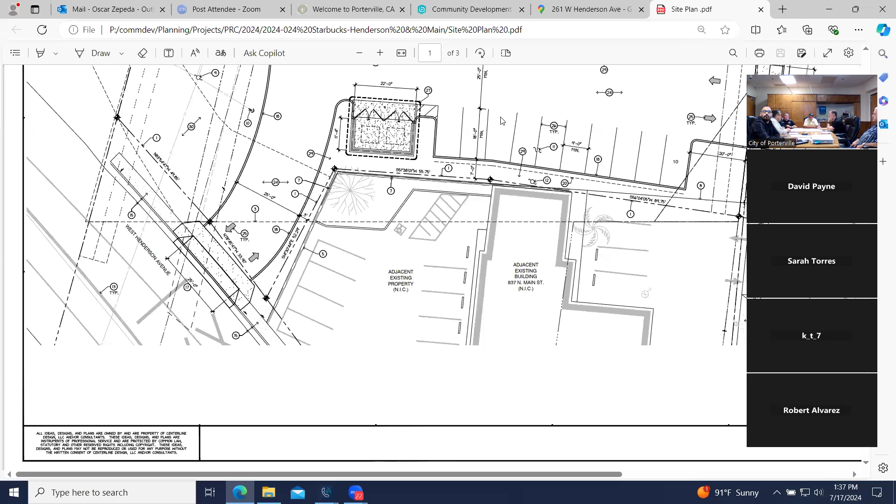So it'll just make it difficult. The other thing would be on Main Street. I know we are still going back and forth regarding lefts coming out at that point - a left in, or even a left out as well. So we're kind of still looking at the geometry a little bit more just to see how that would work, but I think as of right now everything's going to be right in, right out on both of them.

Yeah, you spoke to Hal Lore, and he's on the call. He's our engineer, and yeah, we were aware this will be right in, right out only.

On the trail, for clarification purposes, is it going to follow the old railroad down there? And then you said it'll be like a pedestrian crosswalk with the kind of yield lights and sort of thing. Yes, that'll be great, and it'll look a lot better than right there now. Oh yeah.

Okay, and you guys will have that opportunity to even make a couple of ADA walkways back to there, so that way we can maybe even get rid of - well, not in this case, 'cause I think there's already infill of sidewalk on both sides, on the north and the south. But I know future developments will be able to utilize that trail and maybe get rid of the sidewalk in the front of the properties there along Main Street and stuff.

In terms of this design, I mean, it's all pretty standard. There's a curb here already, so we'd obviously cut it out, but this is all fine with you guys. I think with that, we're probably gonna - I don't know if you ever, we call them pork chops around here, where we basically kind of prohibit the left turn to come out from the development. So we kind of make sure that we put a middle median in.

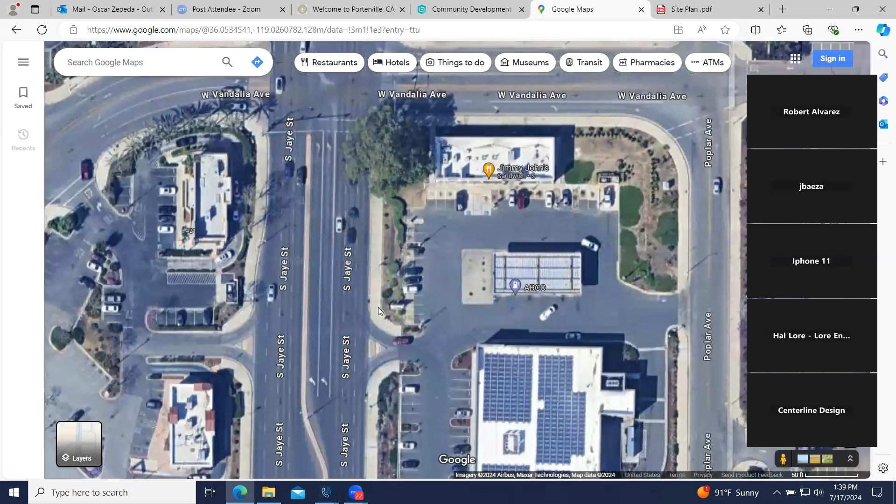Just to facilitate the right. If it's feasible to put a left turn over here, that would be great, just obviously for the tenant and the operation and longevity of the project. You're kind of liking that there.

So that'll be marked up for us to put on here. Is there enough room for us? I mean, I know it's wide enough for two vehicles, but I don't know. I guess there would be enough room if we extended it out this way. There is this power pole here.

That's pretty wide. I mean, sorry, this is Hal Lore, the civil. It's probably 60, 70 feet across there, curb return to curb return. We were hoping to stick with a standard commercial approach and then maybe come up with a custom solution.

The pork chops are difficult just because you're trying to prevent people from effectively turning left, and to get that in, they end up being big. We're just worried that we're going to sneak into the neighbor or into some easements and things like that. There's not a lot of room there to do that. And what Hal said, there's a lot of...

Right in, right out. Sorry, just kind of brainstorming out loud, trying to come up with something more effective than that large pork chop.

With all that, when he referenced the easements, there are a lot of easements on this property. Obviously we wouldn't have come this far if we didn't think we could work around it, and I think the site plan turned out pretty nice. But there's one here that our drive-through kind of goes through, and I think Hal's worried about a couple of the easements down here. This must be the easement for the trail. Obviously it wouldn't go over that far, but I'm assuming that's something we'll address during plan check.

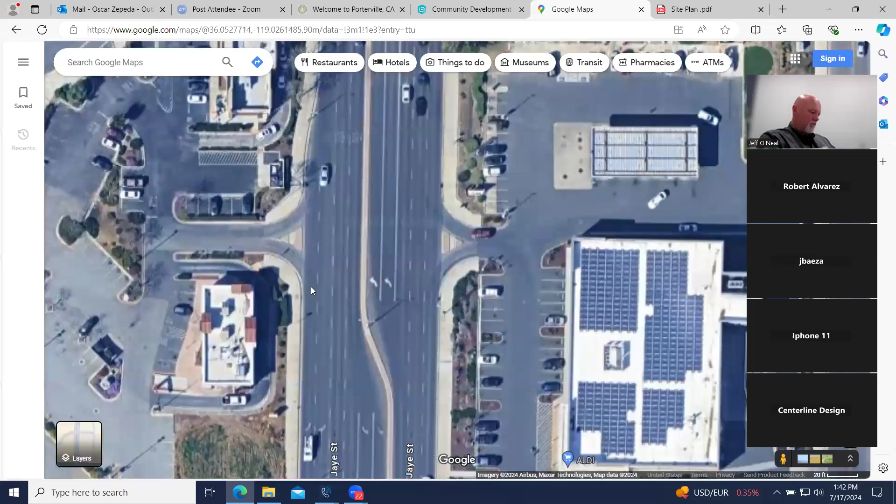I think the ones off if you go off to, let's see, the skate park—if you go to the skate park, we put little small ones there. I don't remember how big those were. Yeah, it's a little smaller, a little bit.

So they are a little bit smaller, and I've seen some people still been able to make that left turn there. And so it's wide enough to do it.

The only issue, Daniel, is that we modified the fire code, and we don't do that for entrance permits—oh wow, 16 feet on each side. The fire code called for 12, but everybody in the area, because equipment's getting bigger, longer, heavier, wider, all that stuff, area fire marshals all modified ours to expand that where there's an island, to make it 16 feet on either side, in case we have to deploy in that area.

Is that how the 16 feet is measured, from the end, the curb? So on the corner of the approach, on the right side it'd be a 16-foot wide opening, and then on the left-hand side, a 16-foot wide opening, at a perpendicular angle.

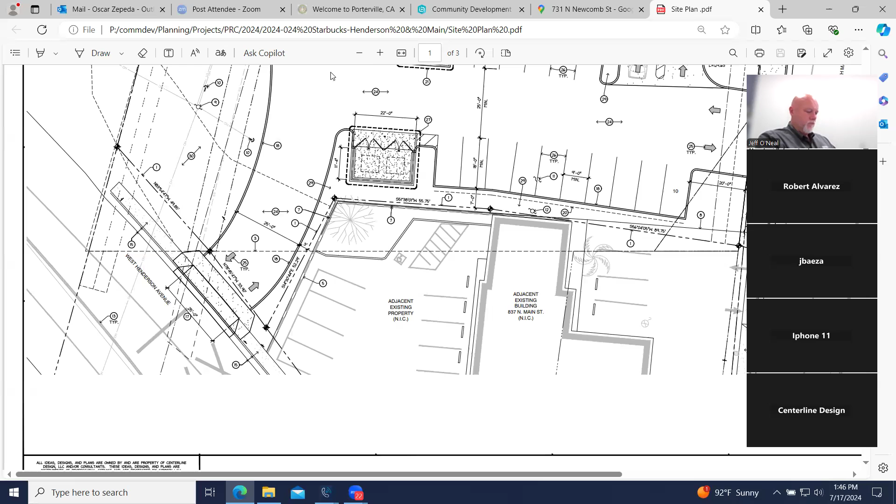And I do believe everything's there. So, storm drain going? Is this a good time to talk about that? Okay, so we were anticipating just kind of a sheet flow out here.

Is that something - so with the new MS4 standards, they're going to have to change a little bit more. And so we would need some calculations from the state MS4s. We usually use their spreadsheet that kind of dictates what kind of pervious concrete can be used, or something on site like a drainage swale. Once that fills up to a certain point, it can get out into the actual storm drain system. Okay, that will be part of the comments.

So the post-construction you're speaking of, is that just at the state level only? It's not that you don't have one for yourself? You're just keeping the state one? No, it'll just be state level. Just curious, do you know if this area drains to like a regional master plan basin, a city basin? It does. It does.

It's a bigger thing, but here in Fresno, we've got a local flood control district separate from the city. They manage our Clovis Fresno drainage system. So for years they've been successful in letting the basin be the post-construction feature, so to speak, to handle the city. So as we develop in Fresno and Clovis, we don't have the post-construction requirement, because the regional basin the city provides has the ability to retain all of that water.

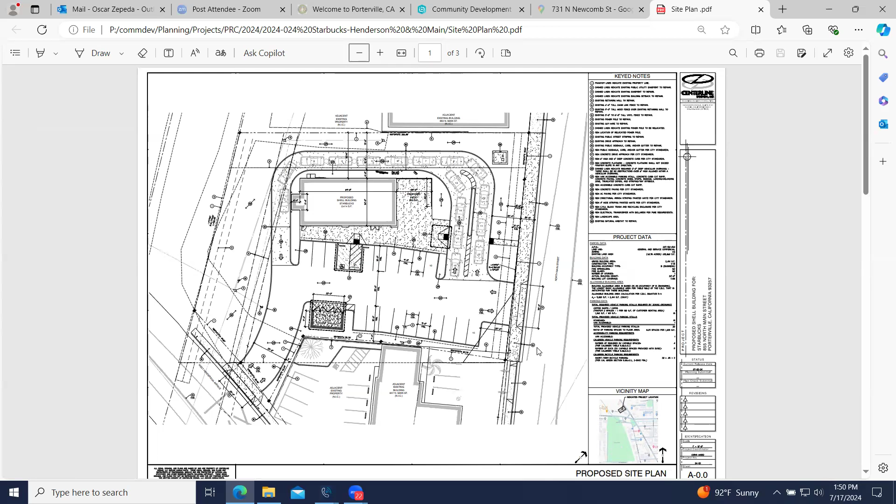I do believe water and sewer are available, so I think - speaking of that sewer - Mr. Melvin here was telling me it's over here somewhere where we could tie in, correct?

Remember years ago when I bought the property, they had partially opened that up where Sierra Appliances is up top there. There's a lateral that's going down the back of the property and goes to Henderson Avenue. Yeah, and it's in place. It's there. It's never been dug up since I've owned the property, that's for sure. Okay, there we go. Great.

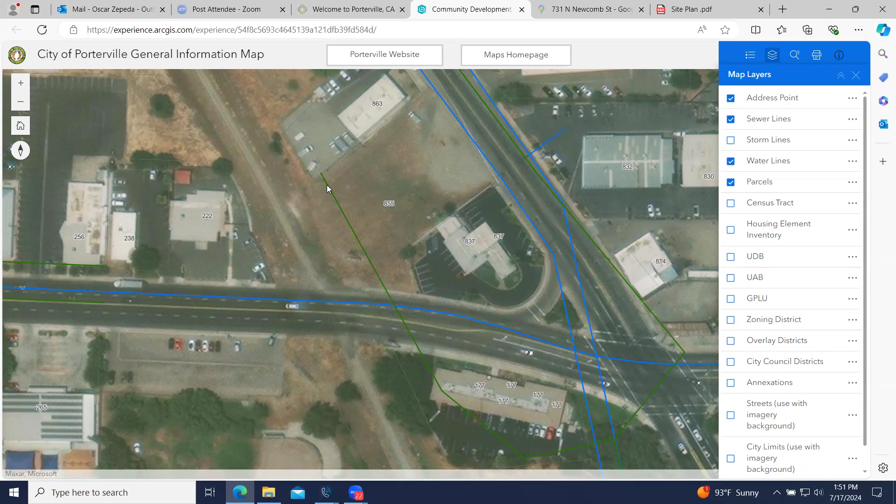Yeah, I was going to ask if that was because that easement came up on our title report, and we didn't see any visual evidence of the pipeline, which is not uncommon, but wanted to ask the city if that is an active pipeline, if we could use it, if it was of use to us.

Yes, that is an active sewer main, and there is a manhole right there. You can't really see it from this aerial, but there is a manhole just where it drops down real steep right there toward Henderson.

Up in the dirt area, I believe. It's been a while since I've been out there. So as it steps down the grade past the pole, you're saying there's probably a manhole there. Correct. I don't think we located that, it could have been covered. It'd be to the left, right? Yeah, the other way. You're saying it's in this embankment to our left? Yeah, that's correct.

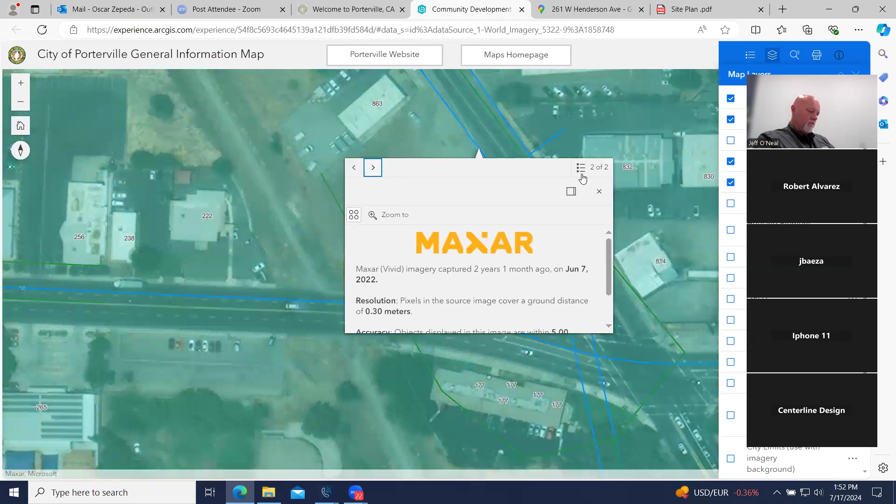And where are you able to share with us where the water tie-in would be? Is it off of Main Street? Yeah, there is one off of Main Street. So we have either option? Main or Henderson, okay. And how would you determine what the best option is going to be for water? We would, I mean, you have one on your frontage on the Main Street side, so I would take that, it just saves the trench repair and so forth. We'd have to look physically where it sits, it's probably somewhat in the lane. That's fine, let's assume that one, since we already have to do curb and gutter on that side anyways.

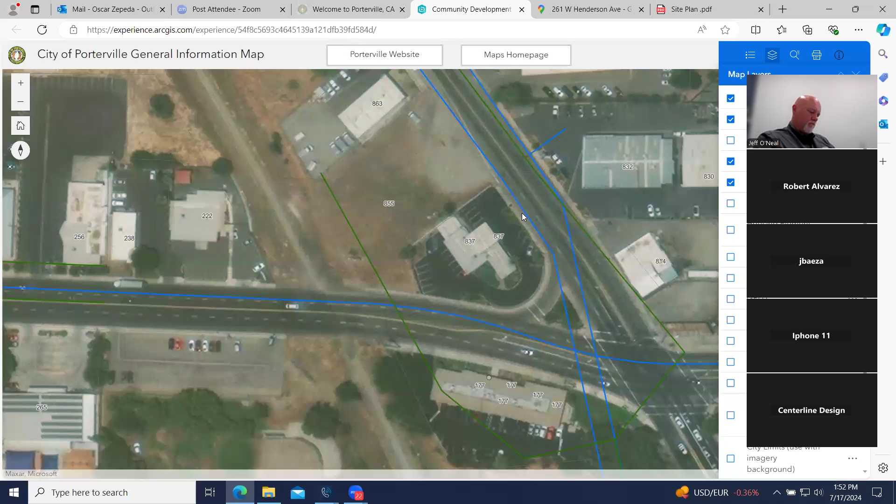And then power, while we're on the topic of utilities, we put the transformer over here just from the more digging we did after we submitted this. Our dry utility consultant said this pole has way too much going on to do anything else, so he thinks we're going to put in a new pole here that's going to bring power in. Our hope is to put the transformer somewhere over here outside of car 2, or maybe if it fits back here, but kind of put the transformer way closer to the power source and where it's going to feed the building.

I think just as long as we get buy-off from Edison, we should be okay, right? Yeah, just, I don't know if you guys care where the transformer is located or if there's any setback requirements with this property line. They have setback requirements probably. Yeah, Hal, I'm sure Hal knows.

Or can figure out. We do have a neighbor with a pole for their power. Michael, I don't know if I've discussed with the utility consultant where the power for your building is coming from. Can you say that again, where are they projecting it coming from? Not off the pole with the tie down or the down guy we kept talking about, but it's going to feed off that one up to Keynote 9 on the very top of the site plan, out kind of between cars 2 and 3. That's where he's forecasting the new pole going.

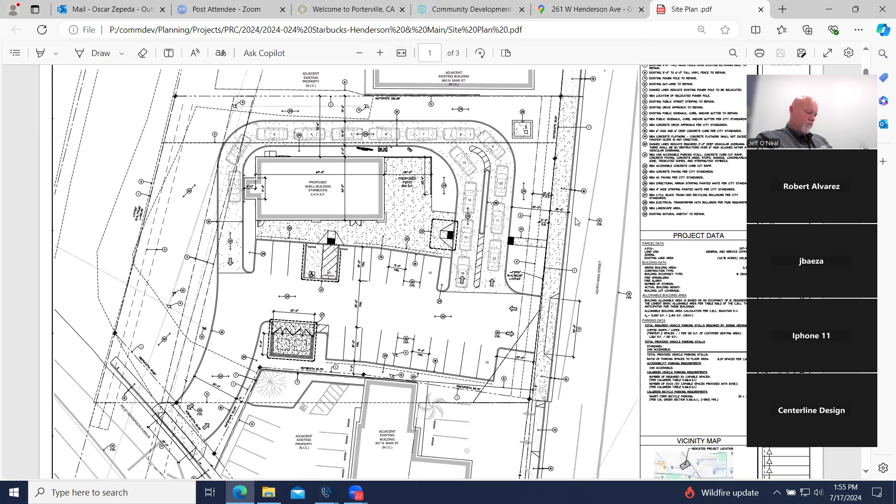I know that Main Street and Henderson are our major arterials, and I know we're not going to be changing the alignment of the existing curbs that are there now. I think most of the right-of-way take will be basically to the east. I don't see, but like I said, we'll take a look at that a little bit closer before we send these comments out, so we make sure we get the true alignment out there. Okay, I imagine we're just going to patch it to match.

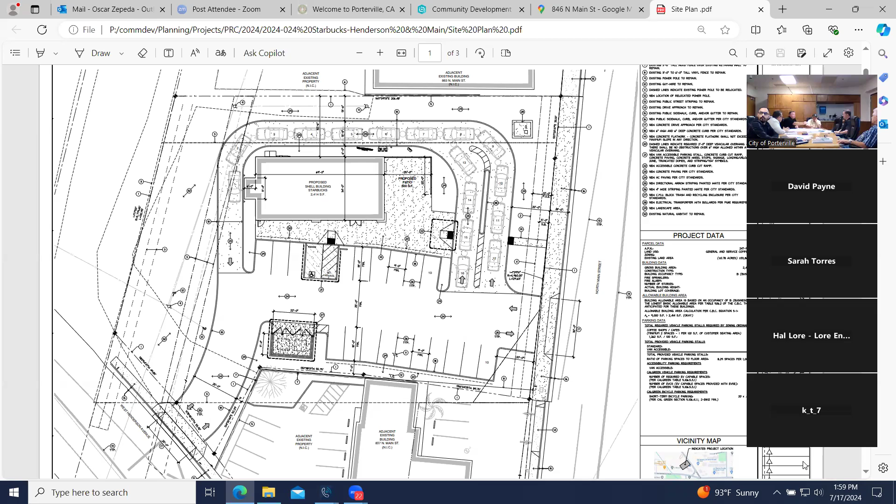But other than that, everything else looked good as proposed: 25-foot lanes, entry and exit. We discussed a little if there's any pork chop island going in there, the 16-foot requirement for each lane on either side of that. But other than that, everything else measured out good.

Okay, great, thank you. Next with building. At this time, no comments from building. We will probably send this out to Interwest as a third-party review.

What was that name again? Interwest. Okay. They're out of Fresno—well, there are a lot of towns, but the one we work with is out of Fresno.

Our centerline design architect is on the call—Philip, can you hear us? Yes, I can. Are you familiar with Interwest? Yes. Building doesn't have any comments right now. I forget if there was anything you or Chris wanted to address while building's here. No, not that I can think of.

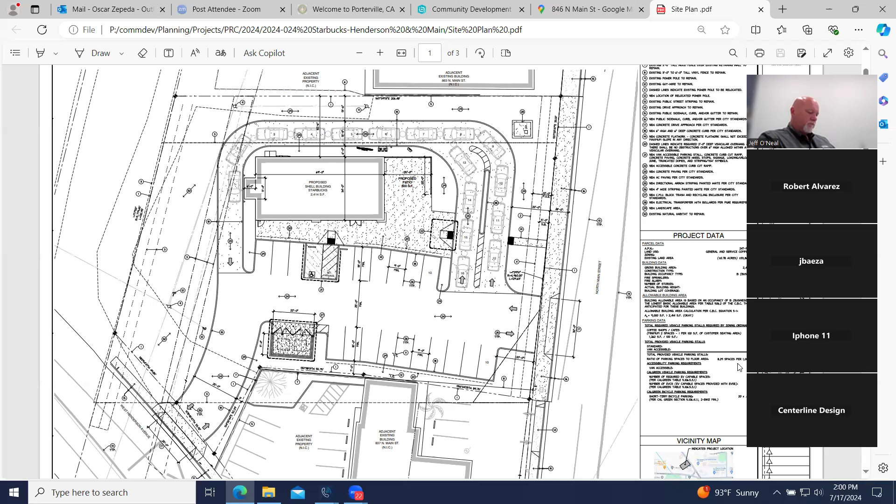So I have a question: in terms of your grading package, civil package, can you describe how that will work? Will it be a combination with the building set, or a standalone submittal, and who that would go to? Yeah, that would be submitted all at once—civil and building together.

Do you know what the review times are right now for Interwest, like what we can expect for comments? Honestly, they get theirs done quicker than we usually do, but what we don't do is give out their comments first—we wait for us to be done and give everything at once. Because what we've done in the past is give out one set, it gets resubmitted, and we haven't given ours yet, and it gets confusing.

So you'll review it first before it goes to Interwest, or vice versa? The building department will review it, do all the description, all the main stuff—they help us do all the deep plan review. But then at the city you still have engineering, planning, and the fire department, you know what I mean. When you do get comments, it'll be any comments from the city plus the Interwest comments all at once.

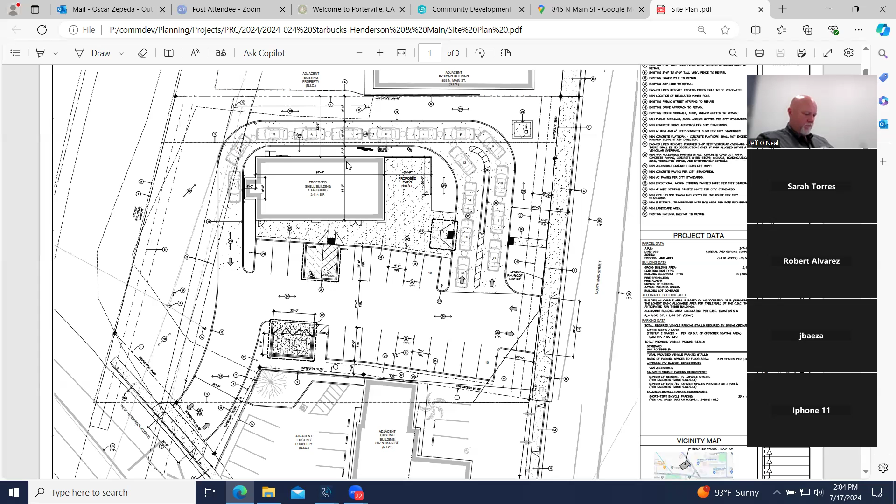Well, I wonder if you maybe took somewhere over here and kind of angled a 3-bin in here, where they could still come in, do their stab and go out. Is there a way to figure out if its current location will work for the stab? I know it looks tight, but I don't know if there's a way to measure or quantify it. For a direct stab, it doesn't look like it's going to work.

With the trash trucks, they're pretty large, as big as my fire truck. So I'm looking at, could I turn a fire truck in there? Oh yeah. So even if, okay, I don't know if this area could work here. We were just, that's where the hill is.

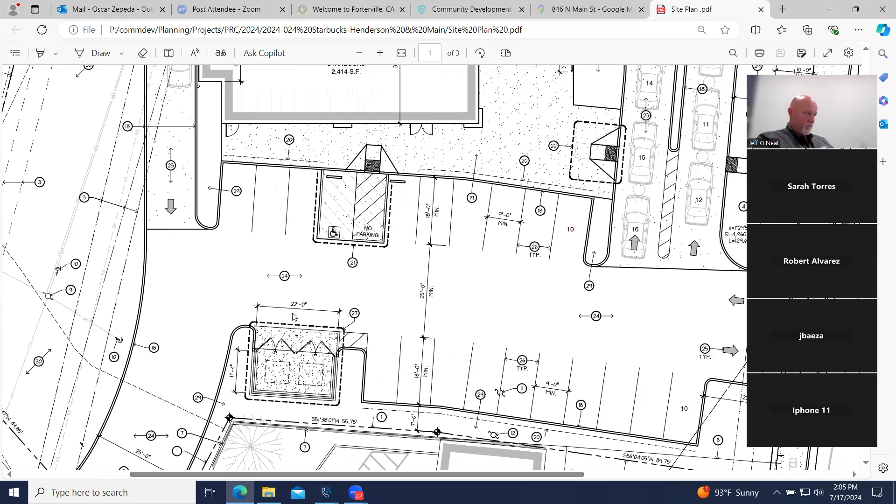That's where it slopes. Just to ask the question, is there any chance that we're currently showing an oversized trash enclosure for this one building? Because it won't have a grease component. Still requires, how wide is the triple bin? 28 feet plus landscaping, 3 feet landscaping on each side.

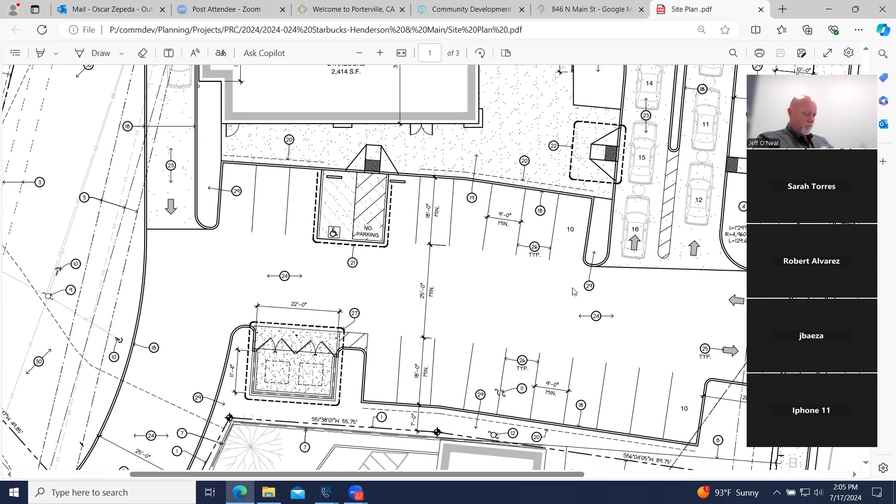And that's a state mandate, 28 feet for the triple bin? Philip, are you aware of that? The 28-foot wide triple bin requirement? No, not that I know of. We just did one and it was this size, the last couple we've done.

The triple bin is for what, recycle, trash, and food waste? Yeah, correct. Is that only if you're actually cooking though? If you're just prepackaged only?

Philip, is this a 22-foot wide design? It's the same as the last few we've done, correct? Yeah, this is off of Dinuba. Yeah, I just wasn't able to find a standard online from the city of Porterville to match. Yeah, I think this is acceptable for state, or this is everything we've been doing.

Is this the exact design? And Robert was talking on behalf of Brianna. She's out today. She's the one with all the info. Okay, we'll just revisit with her and won't confirm just that. Okay.

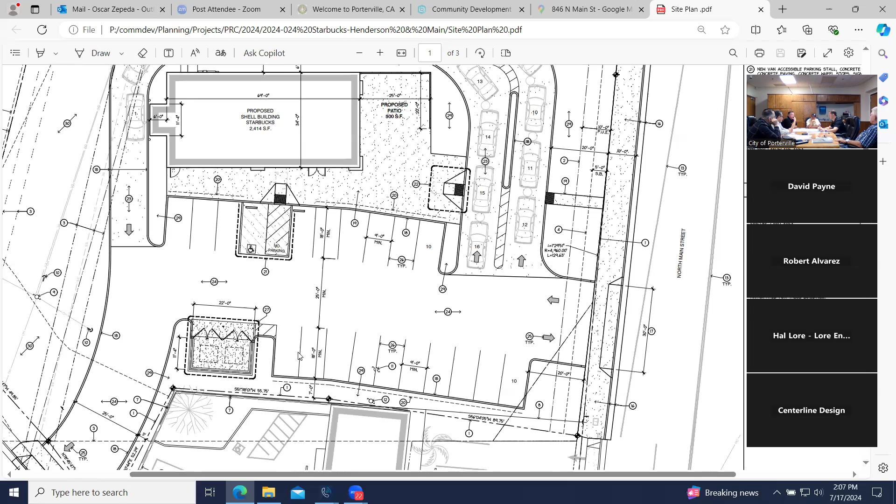Yeah, rather than obviously under the building, that's a different story. Do we know what kind of easement it is? There's so many on this, I don't remember. Are you talking about the reciprocal access easement? No, we're talking about the easement that kind of goes through the corner of the drive-through all the way down. Yeah, that is the city's sewer easement through there, is what that is.

I think it's in favor of the city. We can pull the document and look, but it's probably just like a standard PUE where you're allowed to pave over it but not necessarily place trees. Sometimes that comes up that way, depends on how old it is. Okay.

So not a trash enclosure. I mean, the only thing that would be on that would just be the wall. Possibly an apron, but it probably wouldn't be insurmountable to get under it if you had to, in the unlikely case. That'd be perfect.

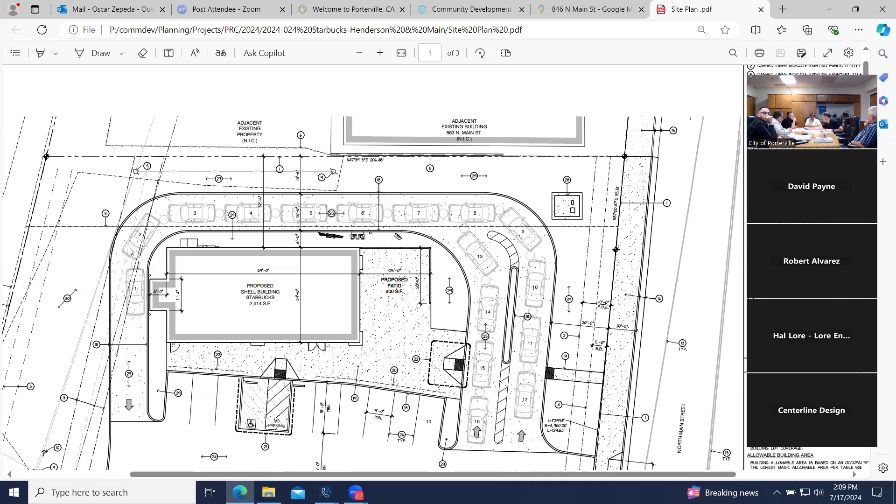The thing is with Starbucks, city regulations come first, but they want a safe walking path to this too. So I think it might make more sense here than way over here as well. We'll talk to them, get a couple ideas, and go from there.

Thank you, Robert. Next with the water department, David, any other comments? Yeah, a lead-free state-approved backflow assembly will need to be installed on the domestic water service, as well as a state-approved backflow assembly on the landscape service. That would be water's only comments.

Thank you. Then for planning, it's just complying with the Porterville Development Ordinance, with some minor adjustments, including a planter every 8 stalls for non-commercial, non-residential projects. For example, here on the south side we have 10 stalls, so we would need one between those stalls, and also on the north side, for the development ordinance.

As far as the architectural articulation of the building, it does meet our minimum standards. Another comment would be in regards to the queuing space for the drive-through facility. Looks like the menu board is here, so it will meet that minimum of 6 cars for queuing space behind the menu board.

Before you get to it or after? It must be after the menu board — 6 back from there, so we'll count it that way. 6 cars back, so it looks like we meet that criteria here.

As far as the number of parking stalls, it will require 1 per every 100 square feet of seating area. Looks like there's plenty, depending on the floor seating area — the calc is on there somewhere.

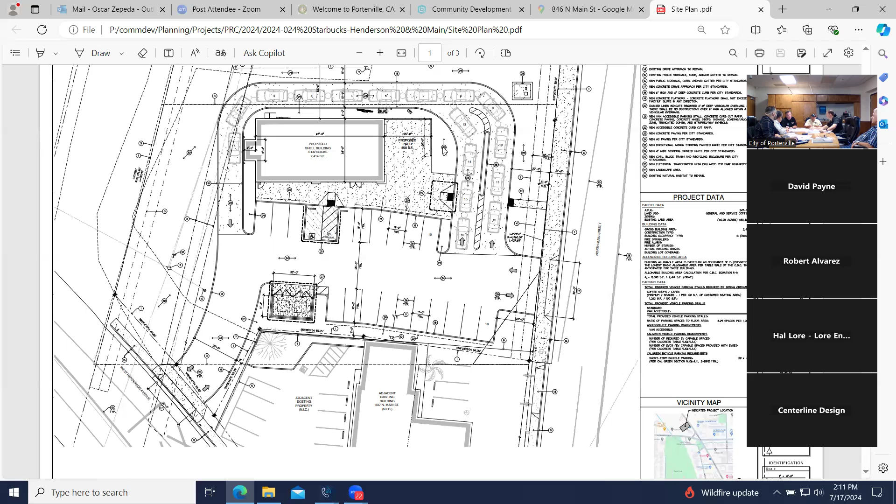When you said we had to put in planters, I was a little concerned it would mess with the parking requirements, but I think we were already over by like 6 or 8 stalls, if I remember. Yeah, he's got it here — 2 spaces per 100 square feet of customer seating area, so he says 13, that's right here.

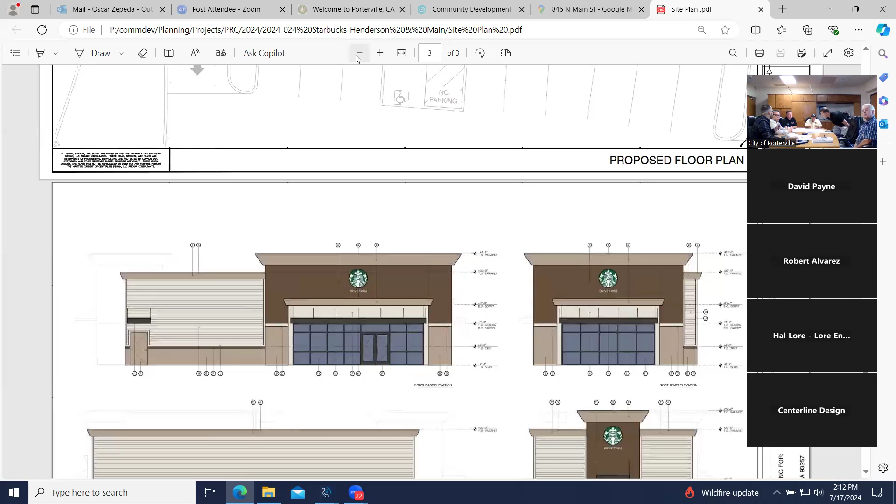There wasn't a floor plan, so we weren't able to verify the total. Would it just be outdoor seating area, no interior? No, this is going to be a full cafe, so interior service and patio. So we'll evaluate that with the floor plan — the reduction in parking spaces might help accommodate that as well.

Yes, well, and we could throw a couple more parking spaces here too, so okay.

Signage complying with section 305 of the code, which is determined dependent on the linear frontage of the building facing the public street. But yeah, great design here — not many comments from the planning department, but those were some of the major comments for this project. Okay, sounds great, thank you.

That is all the departments providing comments related to the project being presented. Are there any questions on behalf of the applicant or the owner at this time to the city staff?

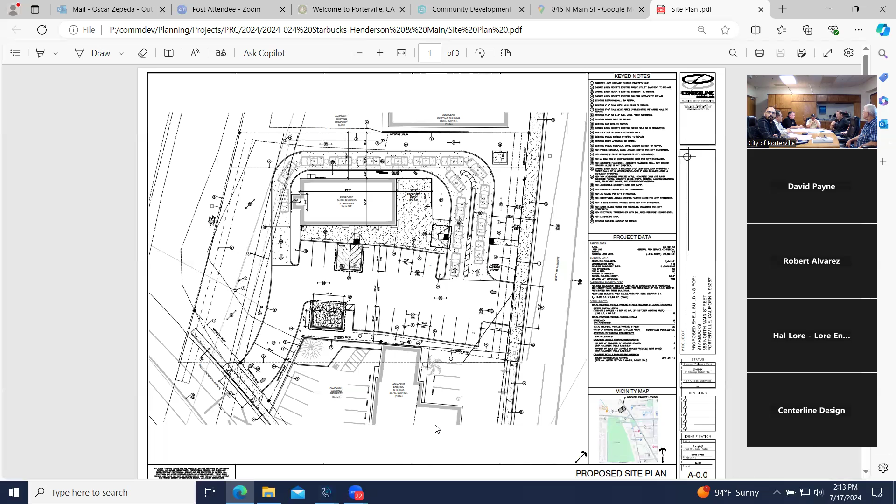Most everything that I had has already been answered. The one outstanding item I want to try to get some information on is development fees and potential impact fees — that's always a big X factor in these projects. So is there any information on that?

Will that be with engineering? Yeah, we can come up with a couple of preliminary numbers — we've done it before, just to know if there's anything out of the ordinary. Obviously there's going to be plan check fees and things of that nature, but we want to make sure there's no big unforeseen impact fee. We can get this going too. Okay, thank you, so that'll all come from engineering.

All right, I think that's it on our end. Sounds good, well, thank you for the application. As stated previously, we'll gather each department's comments related to the project and provide it in a letter to the applicant in about 2 weeks' timeframe. Okay, thank you, thank you everybody.